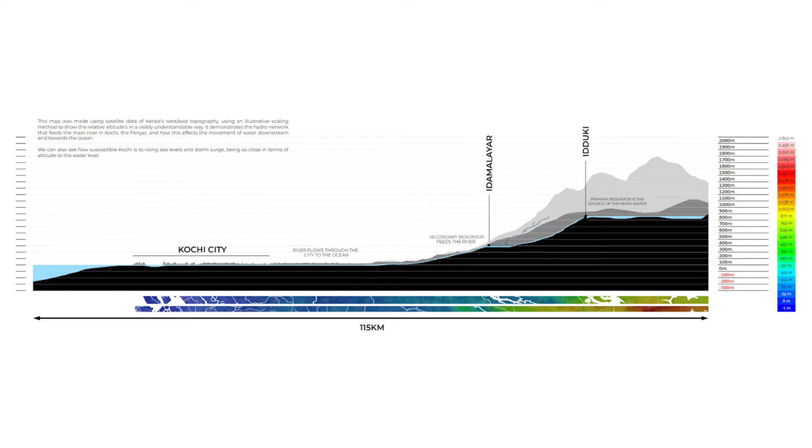Water has always been important to Kerala, but climate change is causing adverse effects like flooding to become more destructive every year. The complex network of waterways that runs through Kerala is fed by monsoon rains that occur during the wet season, but these become shorter and sharper, exceeding the carry capacity of the rivers and flooding the surrounding neighbourhoods.

A large part of the issue is caused by mismanagement of hydropower dams in the outskirts of the city. These dams store vast quantities of water to generate electricity in mountain reservoirs that feed the rivers that flow to the coast.

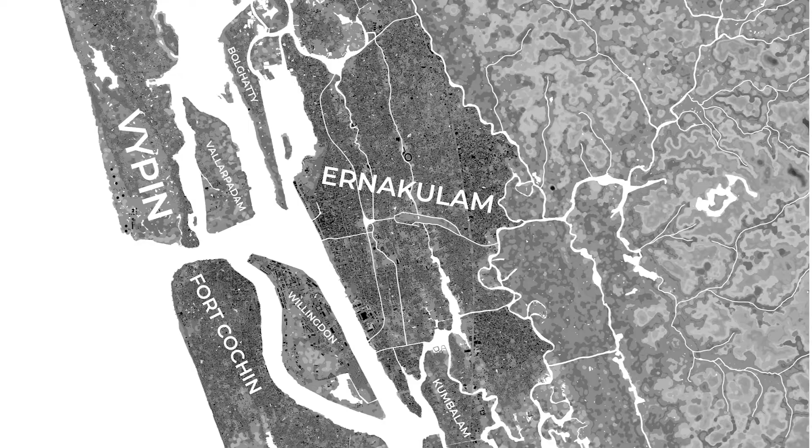Kochi is a coastal city defined by its waterways and canals. Many of these canals were dug during the colonial period and were used for trade and transport, but since many have become mismanaged, full of litter and pollution, this clogging contributes to the urban inundation and waterlogging when heavy rains occur during the wet season.

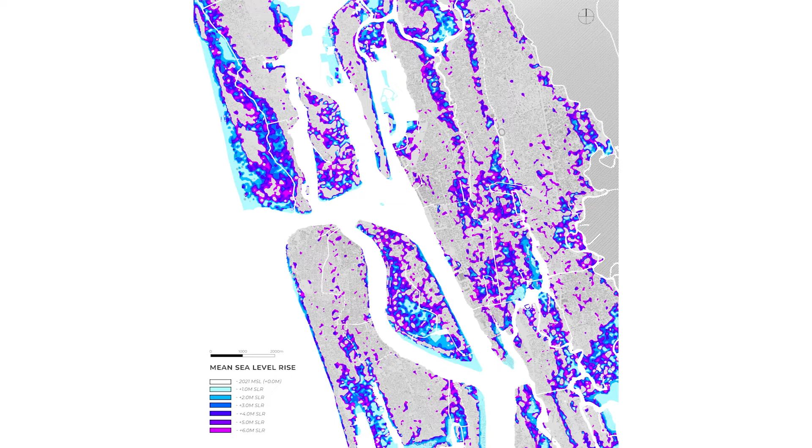Kochi is also only a few metres above sea level on average, so increasingly frequent and violent storm surges flood large areas of the coast. Many important infrastructures, homes and cultural sites are located within these flood zones.

A satellite analysis of ground cover shows a vast reduction in the areas of natural wetland, marsh and mangrove, which naturally defend against floods by retaining soil, breaking waves and absorbing water.

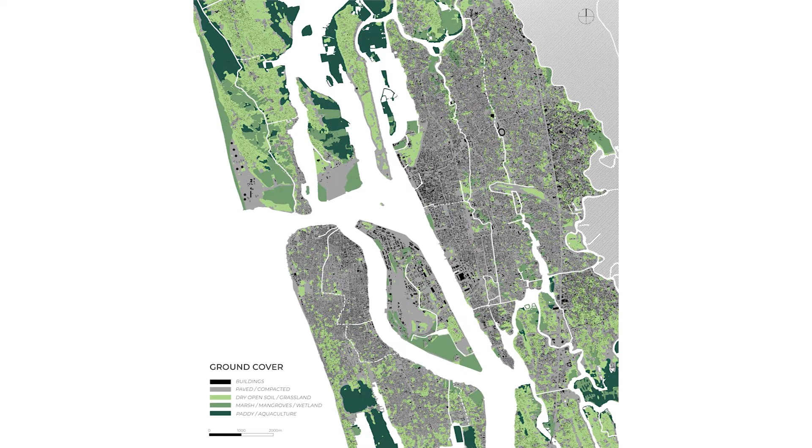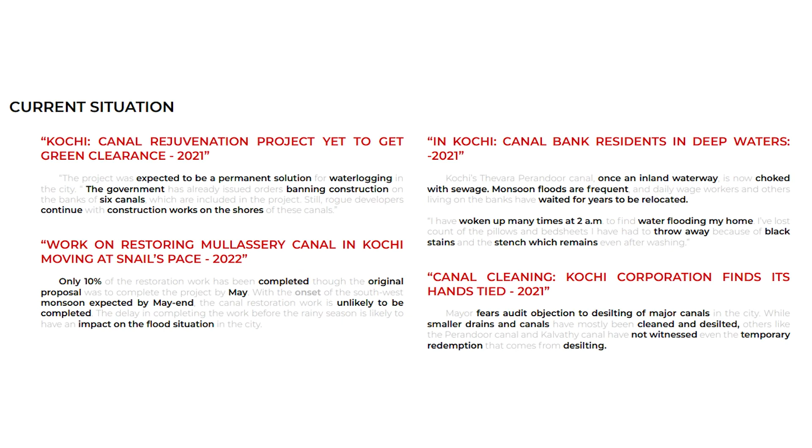As a response to some of the challenges faced in Kochi, an urban strategy was devised to help mitigate some of the most damaging effects. For many years the city has tried to clean out its canals, with varying degrees of success.

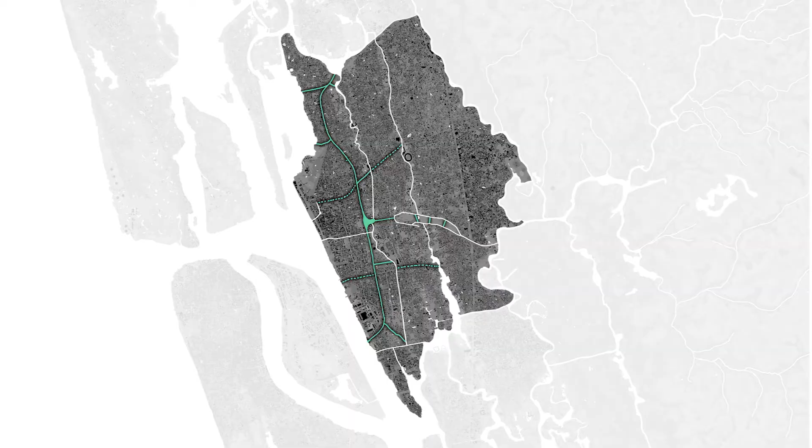The proposed flood management strategy involves creating an interconnected network of waterways that can be drained by the forces of the tide to keep them clear and draining appropriately when floods occur.

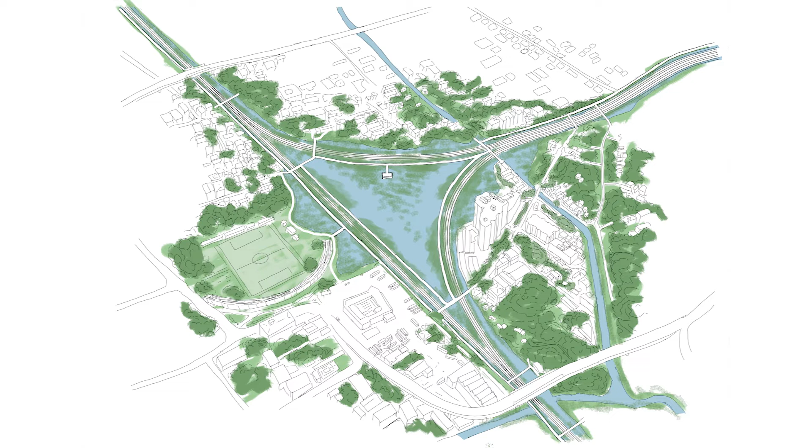Another aspect of the design involves an urban sponge park, creating a fit-to-fail space designed to flood before other areas, saving them from damage. Selecting already low-lying areas and restoring them to their previous wetland state helps with the absorption and release of water, as well as providing many new habitats for wetland bird and insect species.

There is no road to Kammattipadam. To reach the houses you must walk across a highly active railway junction and down into a sunken pit.

The people here are downtrodden, living illegally on land they used to own. Clothes are seen drying on the hot stones of the railway, stray dogs wander seeking scraps, and children play amongst the sewage-polluted water and vast volumes of discarded trash.

The buildings are adapted as best they can to this, but regular flooding occurs that inundates the community. As the residents are technically illegal, Indian Railways grants them no means to add drainage to the area that might alleviate this. It is a health hazard and an unlivable condition that must be addressed.

To make this land fit to fail is to discard the last piece of their home. However, it seems essential to do so. How can we find a way to provide a dual-purpose inhabitation for this land that serves the larger needs of flood management in Kochi, whilst helping the downtrodden out of their forced poverty?

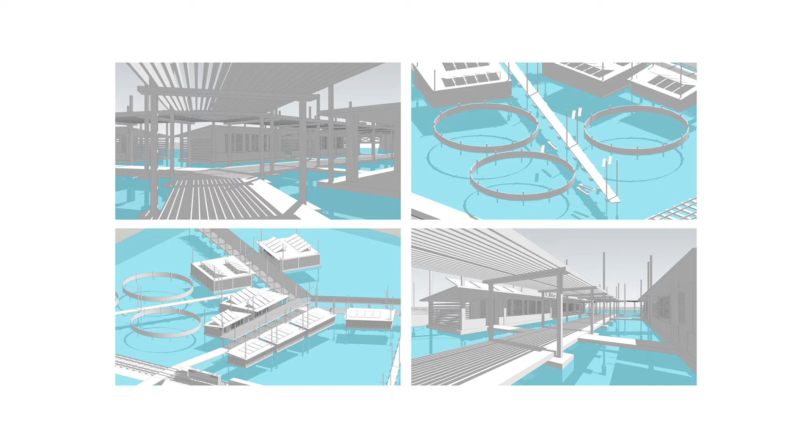Drawing on both ancient traditions and modern precedents, the scheme set out to be amphibious, to coexist with water. It had to adapt to changing water levels and flood conditions, while still providing a comfortable and safe environment.

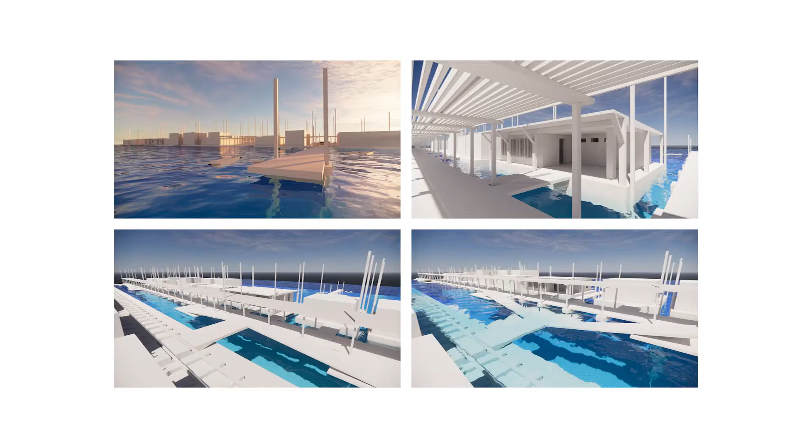Development focused on creating community, while allowing individual families to expand as their needs required. A modular system was devised, with standardized units that could be self-assembled. It was essential to include the community in this construction so that they felt ownership over what was theirs.

A community restored, coexisting with water, living with flood.